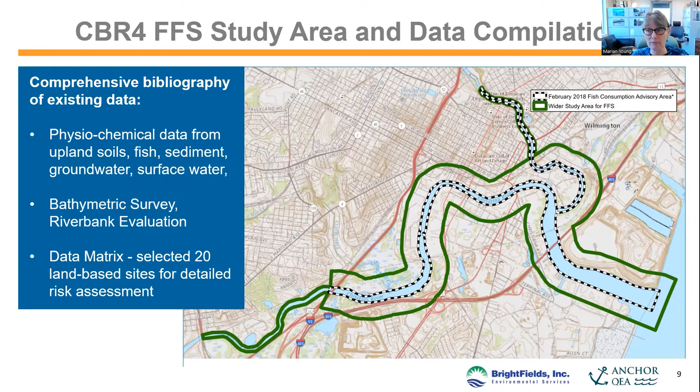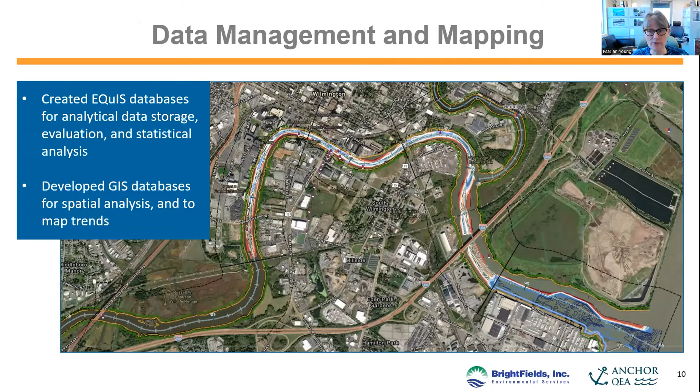We're using EQuIS and GIS databases to store, manage, and statistically analyze test results and to map contamination patterns and data trends. We're working on a report that will summarize baseline conditions and identify data gaps, and we're preparing proposals to describe the studies that are needed to fill those data gaps. So that's the update on the focused feasibility study, and you'll hear more about this project at a future workshop.

Today's workshop will focus on reviewing and discussing the draft CBR4 goals and strategies and capturing all your thoughts and ideas to strengthen the CBR4 program. But before we delve into the workshop, we're going to hear from an inspiring speaker, Lisa Bloodgood, who is doing similar river cleanup and restoration projects on Newtown Creek in Brooklyn, New York. Until very recently, Lisa was the Director of Education and Advocacy at the Newtown Creek Alliance, a community-based organization dedicated to restoring, revealing, and revitalizing Newtown Creek.

There's a lot of similarities between their story and our story. Newtown Creek is in the Hudson River estuary, which, like the Delaware estuary, is part of the National Estuary Program. In 2017-2018, the Newtown Creek Alliance worked with their partners at Riverkeeper and the Estuary Program to create a vision plan, and this is what we're doing now. They identified priority issues and proposed a list of projects to address remediation, restoration, recreation, and resilience. Lisa recently took a new position at North Brooklyn Neighbors, where she continues to work on community-based solutions for public space and the environment. She's here today to talk with us about how important a vision plan was to Newtown Creek Alliance's success. Take it away, Lisa.

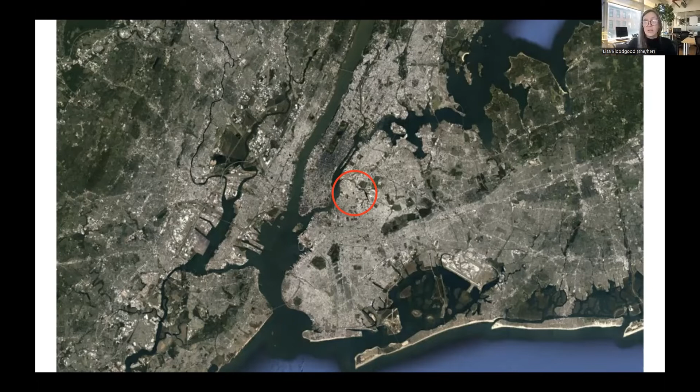Just for a little bit more context, Newtown Creek is part of the larger Hudson River estuary system, a border between Brooklyn and Queens, and really centrally located within New York City. As you can see, and we all know, New York City is highly developed, and Newtown Creek has been an industrial waterway for a very long time, but it wasn't always that way. I think it's very important to always ground our future visioning in our past and understanding what the geography and topography was, which helps inform what we're dealing with in our present day and in our future.

So you can see it was a very productive wetlands and was completely industrialized by the middle of the last century.

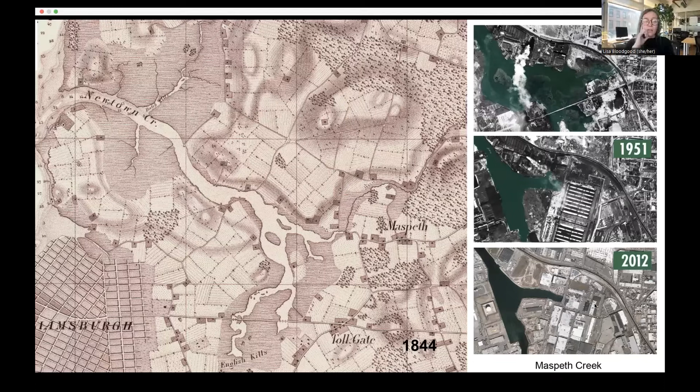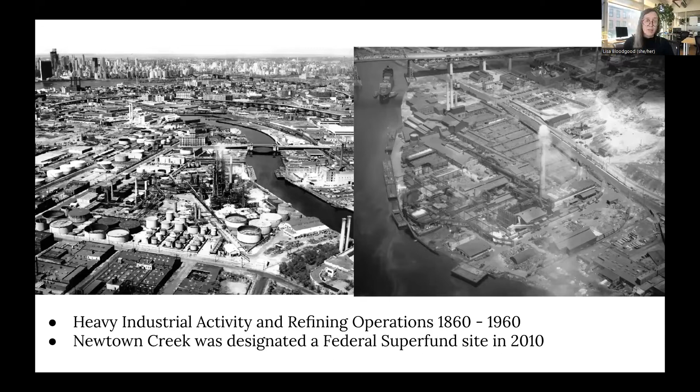Newtown Creek was really the center of industry. This is where modern day oil refining began, and that's a big part of why it's a Superfund site today. These are historic images, we don't have the refineries or chemical facilities there any longer, but that legacy is still there, which is why in 2010 we got our federal Superfund designation.

The vision plan was really about creating an inspiring vision that both boroughs and all the communities around the waterway could get behind. Because it's so industrially zoned, there's been no public access for more than 100 years, so the community has been removed from that waterway and it's been hard for people to imagine what is possible. We're also really interested in making sure the waterway remained industrial. That's important both to the communities that rely on those jobs, and for the city itself.

We have to have industry in our cities to manage things like waste and wastewater treatment facilities. So our vision plan is designed to show the current state, the whole host of project opportunities, and kind of give bigger picture system solutions.

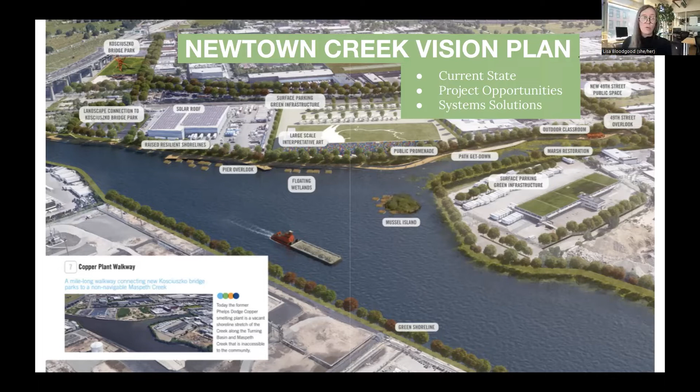I'm going to explain a bit of our process, and then what we've seen in the last 2-3 years since we released the plan. Our approach was really water focused, community driven, and we developed these 4 R's. Resiliency, remediation, restoration, and recreation were the real parameters we wanted to establish for each of these projects.

Partners are everything, we can't do any of this alone. We need city and state elected officials and agencies and community members, and some of our strategic water partners: Swim Coalition, Stormwater Infrastructure Matters, Riverkeeper, Billion Oyster Project, and the Waterfront Alliance, all kind of address different modalities of engaging the water.

Our planning lens: how do we want to view each of these different opportunities? Parks and public space, and others, having clearly defined planning lenses allows people to engage within those contexts. So if somebody's really interested in water quality and coming to a visioning session, they can focus just on water quality and dive deep into that planning lens.

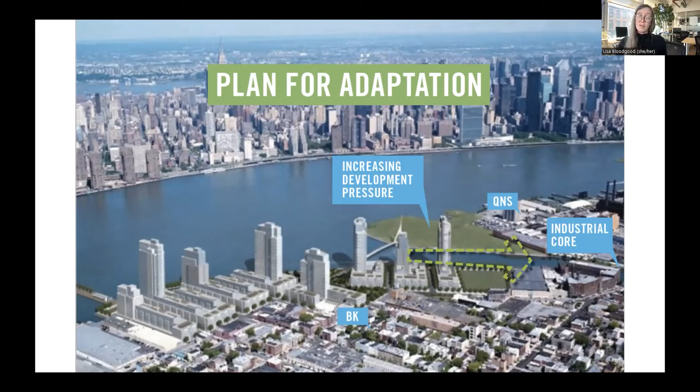And of course climate risks, not just flooding but issues like the urban heat island effect, pollution. Again, we're a federal Superfund site, so that is paramount in how we're thinking about the waterway now and what we want out of that cleanup.

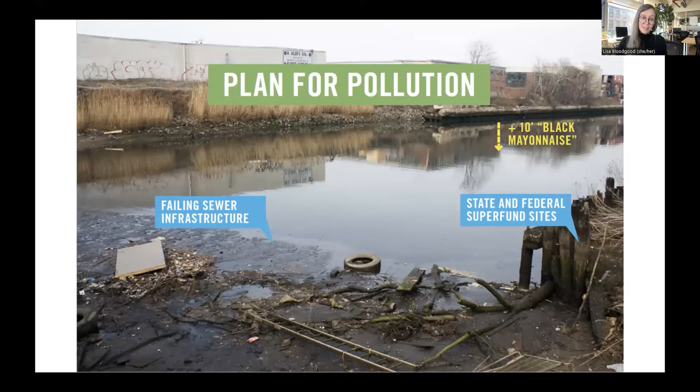Public access is so challenging in industrial spaces, and so we're really having to challenge city planning and zoning codes to allow for those spaces in these non-traditional areas. That has been, I think, one of the most interesting and exhilarating parts of this conversation, redefining how we can use these spaces.

Because it's a Superfund site, we have this pre-existing community engagement group, the CAG, that already had these 12 principles outlined that were most important for the Superfund cleanup. That was also an early foundation for the work in front of us.

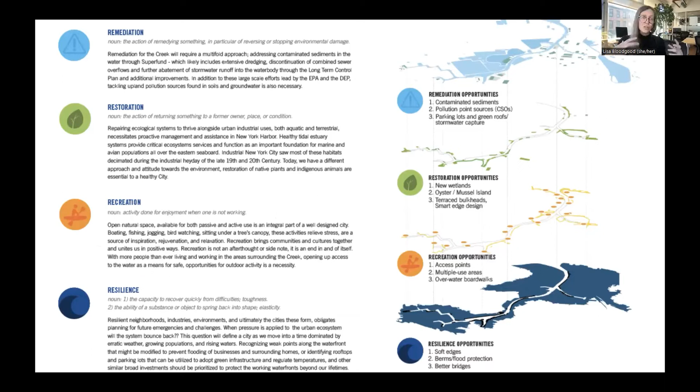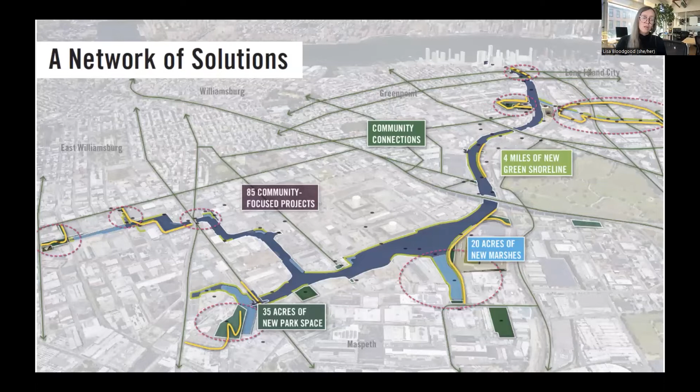And this isn't meant to be an engineering document. This is meant to be an inspirational document, which I think is really important to also articulate.

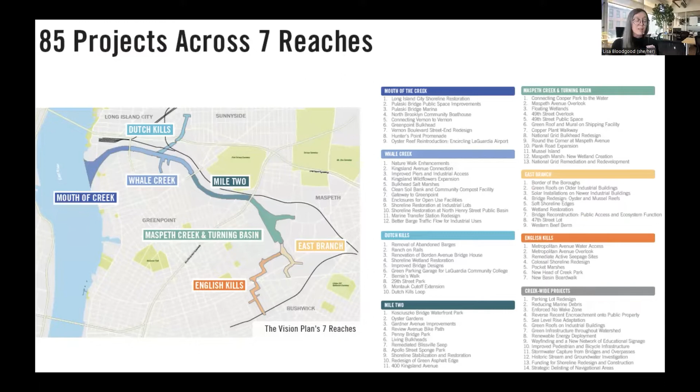Since we launched the vision, the response has been really, really exciting, from regular community members all the way up through our federal representatives and some of the trustees from the Superfund process, like NOAA, the State Department of Environmental Conservation, and Fish and Wildlife Service.

So coming at this idea from both the grassroots community and winning hearts and minds of our youngest members, all the way up through our elected representatives and city agencies and city planners, is key. And we've seen some really exciting activity around certain projects.

This one in particular has been phenomenal to continue to work on, because it started as this idea of transformed urban agriculture in an industrial space and regenerative industrial uses. It's anchored by a community garden that started on some decommissioned rail lines, and it's grown into its own project with its own steering committee.

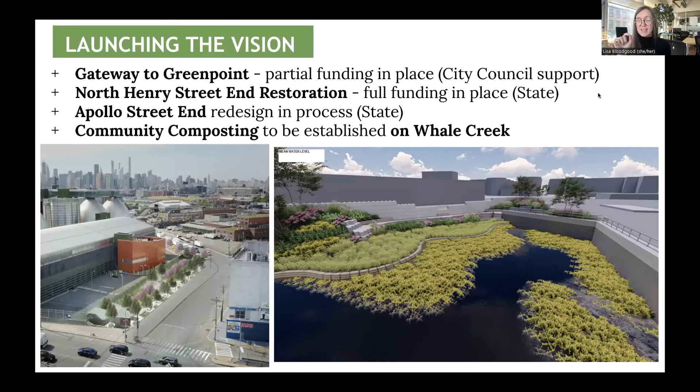So planting seeds goes a very long way.

Something I'm also extremely proud of is this idea of challenging zoning and really thinking about opportunities on the waterfront, on these underutilized industrial properties that could transform how we're viewing our waterfronts and shorelines in these non-traditional spaces.

Every 10 years, New York City Planning Department is required to do a 10-year vision plan for the city's waterfronts. They were really excited to incorporate some of our goals into that broader waterfront planning document, which again was something I'm very proud of.

I'm very excited for the next 10 years of broader New York City waterfront development and how these ideas will begin to transform our shorelines, our access, and our ecology.

And then a slide I do not have, but is also really important within the context of the Superfund and the proposed cleanup we're going to be getting on Newtown Creek - there's no real guarantee that restoration monies will be spent on the waterfront or on our waterway. It can be spent upstate New York, or there can be an in-kind restoration that happens elsewhere.

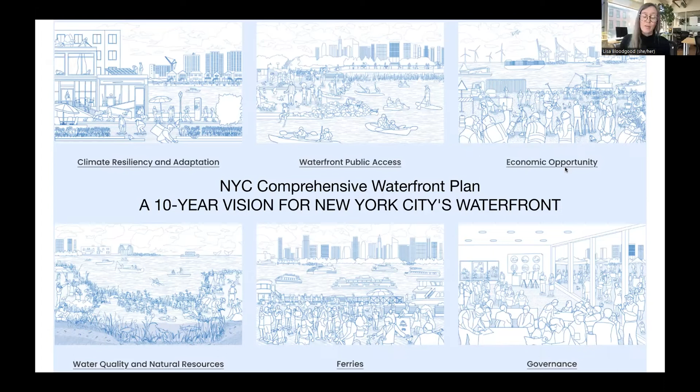That's all I have for you today. But I really hope that what we did in Newtown Creek is inspiring and useful. As much as you can do small actions with small groups of community members in tandem with these bigger vision plans, that's just going to make your process and your end results that much better.

I encourage you to please reach out to myself now at North Brooklyn Neighbors, or our executive director at Newtown Creek Alliance, Willis Elkins, if you'd like to engage the Alliance. But please do take a look at the vision plans online. I think they're beautiful. And thank you again so much for having me.

This is great. Well, and thank you, Lisa, so much.

I think I've been a big admirer of your plan, just looking at it online since we started this effort. And it is a larger area, a more urban area in many ways, even more challenged than what we're looking at here. So I think to myself, well, if they could do it in Newtown Creek, then we can do it here for sure.

But it's nice to look at someone else who's been in the shoes that we are now, or close to it, and think about how that could be successful and really launch things, because we really are looking to this CBR4 plan and vision to launch things here, even though there's been a great amount of work going on, but really to have it as a unifier. And it's so exciting to think that we could be in the place that you are with your plan at this point too. So thank you so much for coming and being part of our program.

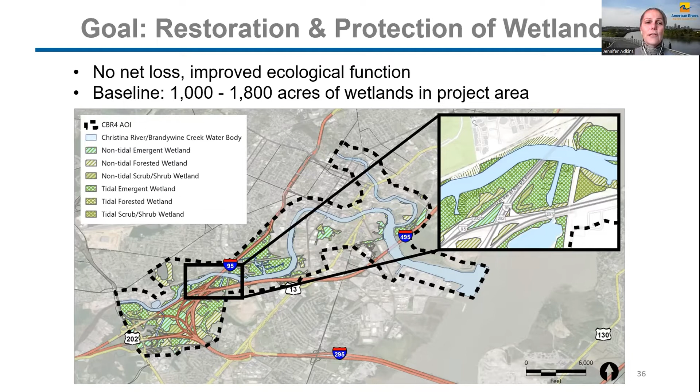We also want to see projects happening that improve wetland functions. Just because you have a big wetland doesn't mean it's as healthy as it could be. It may not be producing as many fish as you'd want, or the water might not be getting cleaned as well as you'd want. Those are the improved functions we want to see from wetlands.

We also have goals around protection of shorelines. Shorelines are another really important habitat and water quality area, where the water meets the land and there's an interchange between them. We have over 100,000 linear feet of shoreline in the project area, and about 60% of that is in some sort of natural state.

By natural state, we mean it's not partially or fully hardened. When we talk about hardened shorelines, we're talking about seawalls or big rock structures that prevent any exchange between the water and the land. For the purposes of river health, we like to see natural shoreline, and that's one of the things we'll be tracking.

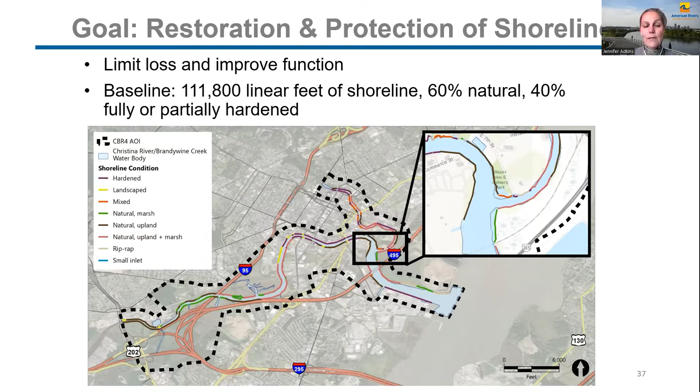What we want to see is very limited loss of the places where there is natural shoreline, and where there isn't, where we have those hardened shorelines, we want to improve the function of those areas by greening them up—a term we've been using—to make them more valuable ecologically for fish and wildlife, but also for water quality.

We also have goals for riparian areas, which are the 100-foot buffers out from the shoreline, from where the water meets the land. That area is critically important for many reasons, including that it's often part of the floodplain—so when water floods and comes up, that's the space where those floodwaters can go.

In addition, those areas help filter water running off the land. If water is running off and picking up pollutants from parking lots or elsewhere, a nice healthy buffer can help prevent some of that pollution from getting into waterways. Along the riverfront, a lot of these areas are used for stormwater management, which helps with water quality.

In our corridor, we have over 1,500 acres within that 100-foot buffer area. Interestingly, even though it's a highly developed area, about 70% is undeveloped—there aren't actual structures right there—which is good, because that's an area that's also vulnerable from a flooding perspective.

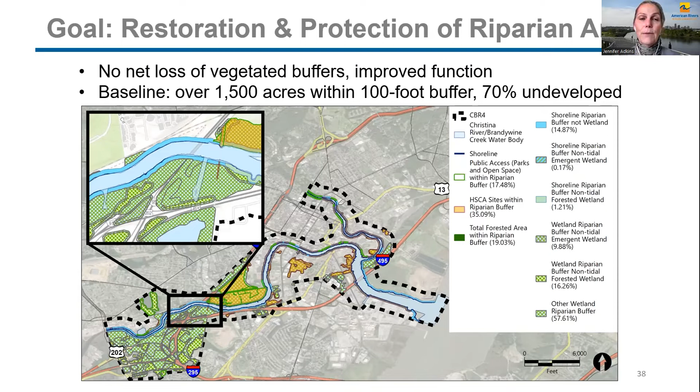What we want to see in our objectives around riparian areas is that we don't lose those buffer areas that have a lot of good vegetation, particularly where there are trees and other vegetation that help filter water. We also want to improve the functions of areas that don't have as much vegetation or the features needed to provide high value function.

The other thing we're looking at and have goals around is that in our corridor we have some adjacent habitat areas that are more upland. There are over 1,500 acres of those kinds of areas in the project area. About 20% are forested, and 35% are protected, meaning they're either parks or in some kind of protected use so they wouldn't be developed or destroyed. Also, over 17% of them are open to the public.

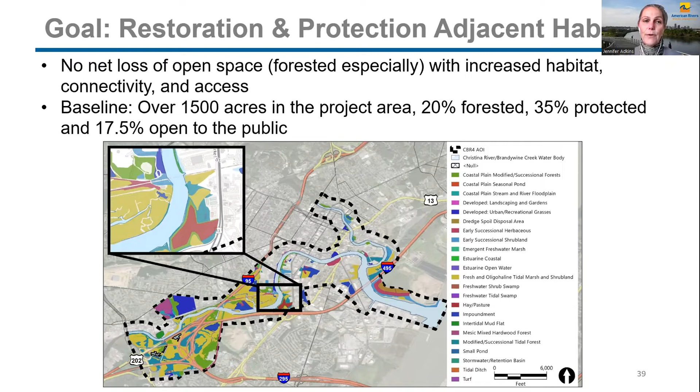So we know that these adjacent areas, especially the ones that are forested, are really important to the corridor overall, and to the quality of water and the habitat in the corridor and in the river. And if they're open to the public, or could be open to the public, they're also really important for access so that people can enjoy some of these areas. And for riparian areas too, looking at how people can be close to the water is important.

And of course, we do have some goals around remediation. Lisa referred to some of the challenges they have regarding contaminants, which sounds super challenging, and we have some of those issues here too. Our whole river is not a Superfund site, but we do have quite a few properties, and you can see those on this map, showing over 530 acres of land in the corridor and over 630 acres under the water. So the subaqueous land under there has been impacted by contamination in some way or another. This is definitely a big issue in the corridor that we want to keep moving forward.

Some of our objectives around this include: we definitely want to get that feasibility study completed, and we want to see continued remediation of the priority sites that have been identified, to reduce loading and to reduce contamination of fish over time. It takes a long time to meet the goals of reducing contaminants in fish tissue, but we're already seeing some progress on that. So that is one of our goals there.

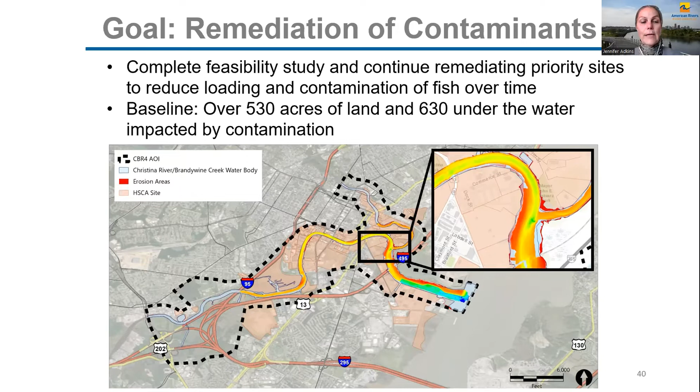And then also access - I've already alluded to this in some of our other goals. But in our project area, I've skipped forward to access - first, resilience. So Lisa mentioned climate being on their list. Well, climate is definitely on our list too, and it is one of the main things we want to be looking at for all of the projects and strategies that we're developing.

In the project area, there are 700 acres of low-lying, nearshore areas, which are places we really want to pay attention to, because if they're undeveloped and have some good natural infrastructure, they can help absorb floodwaters. Important in the baseline is that there are 7 acres of existing tree cover, and we know that trees can absorb floodwaters, and they also help keep neighborhoods cooler as we're expecting more extreme heat.

Our main interest around resilience - I should mention we're mainly looking at resilience to the impacts of climate change: flooding, sea level rise, increased heat, extreme heat. What we really want to see is not a lot of loss of those low-lying natural areas that could be good places for floodwaters to go, increasing tree cover, and a balance of green infrastructure and gray infrastructure to deal with stormwater, making sure flooding doesn't put people or important habitats in harm's way.

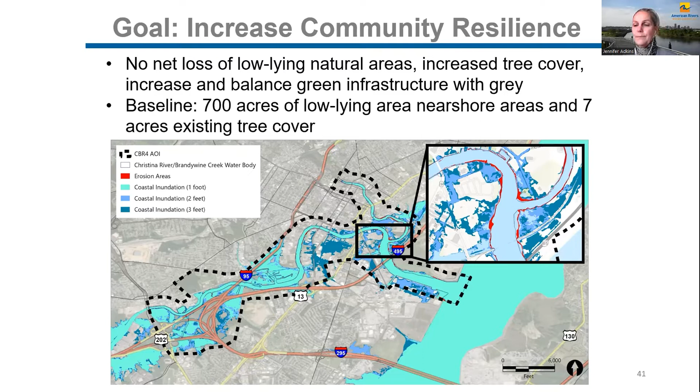And here's access - last but not least, community access to rivers is one of our primary goals too. In the project area, we have over 18,000 linear feet of buffer areas that are publicly accessible, 16 miles of trails, and at least 7 direct access points to the public. Although we know communities value this direct access, there's lots of other access that is just as important - having areas with trees and seating near the water and a variety of views of the water is important too. So we're looking at all of those types of access as we look at the corridor.

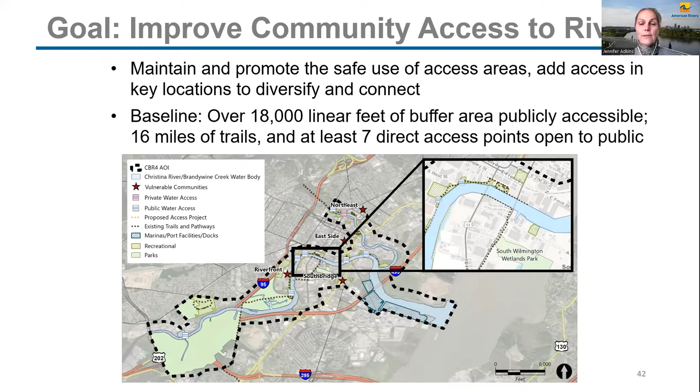We've just started, you can see on this map, to compile existing information, but we're also trying to scope out where some of the opportunities might be. So that's a lot of what we've been working on. Every one of those maps has many data sources behind it, lots of different information that our project team has tracked down, and we're using them to understand where we are right now, so that we can set the goals and then come up with strategies and projects to actually reach those goals.

And so we have also, as a team, started working on strategies. I'm going to give you a really high level, very quick skim through these strategies, because you're going to dive deeper into these in discussion.

Just to give everyone a sense of what kinds of strategies we're talking about, there's a whole realm of restoration strategies, trying to restore different types of habitat and features where they don't exist anymore, or don't exist as much as we want. Everything from doing the actual work to making sure projects have good metrics and goals so we can monitor them over time and see that they're actually having the function we want.

Also providing guidance to landowners and managers, recognizing that conservation organizations and agencies may not be the only folks doing some of these projects. We want landowners and managers to be able to do some of those projects too.

Also in restoration, clearly identifying and implementing projects to restore wetlands, and those habitats in and along the water are going to be some of the most important ones we'll be working on. But also identifying and implementing projects that help connect different key habitats is important.

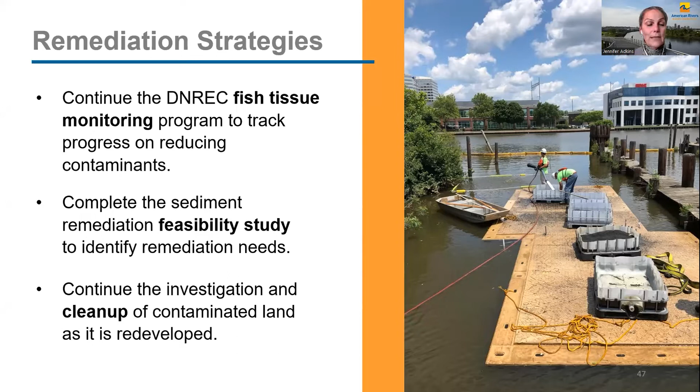Continuing those, but also thinking forward to new approaches needed—whether that's a new approach to remediation that incorporates more restoration and provides tools and BMPs to help those doing remediation make better decisions, in a way that incorporates restoration, but also developing innovative new technologies for remediation.

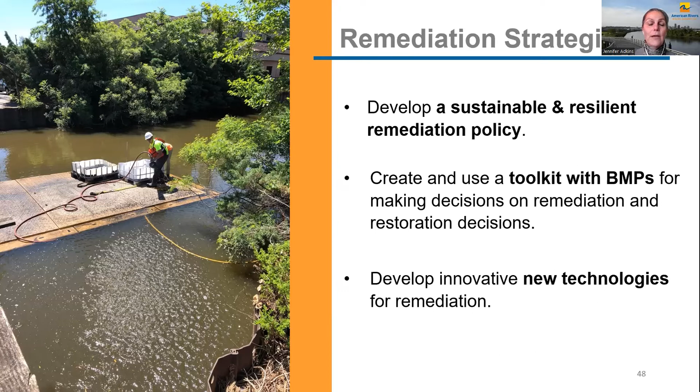A good example project is the work DNREC is doing at the A Street ditch, which this picture is from, where they're applying a new technology to address some of the contaminants there. If successful, we can use it in other places along the river, and other people could use it in other places, potentially along other rivers.

Then we also have resilience strategies, trying to figure out are there projects that we could do that will help make this area more resilient to flooding and sea level rise and intense heat that we're expecting from climate change. We recognize that there is some work around flood studies and modeling that is a lot more involved than what we can do as part of our planning, but we know that needs to happen. There's also an effort by the city underway to develop a resilience plan for sustainability, and we're very interested in taking a look at that and seeing what kinds of strategies we can help forward through this plan.

And then also in resilience, to look at specific projects that could help with flood control, whether that's using green infrastructure or a combination of green infrastructure and harder infrastructure. We also know that trees are going to be incredibly important, greening, to make sure that they're helping to absorb water and helping to cool some of our local communities. And also making sure that we have lots of places where water can actually get into the ground instead of running off, so reducing impervious coverage.

A good example project of a resilience project might be the South Wilmington Wetland Park, which is the graphic you see here, where it's helping to provide flood control but using green infrastructure, providing a lot of habitat and hopefully water quality improvement. It's using green infrastructure along with hard infrastructure. There's also work happening to separate a combined sewer system there, and those two things need to be part of the solution when we're talking about resilience.

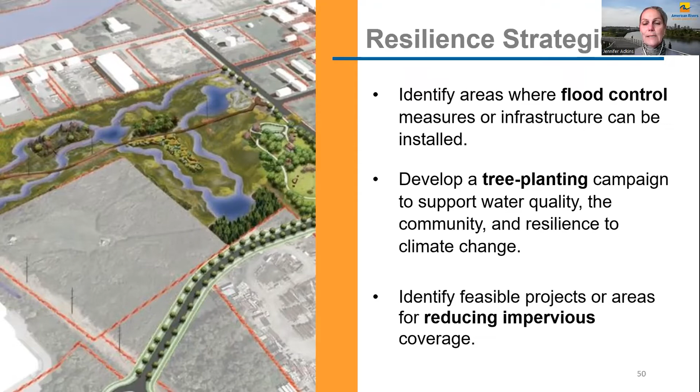And then there are strategies that are more aimed at education and engagement. We've identified a whole range of those, and this is really just skimming the top, a high level overview, but everything from the idea of a community advisory council, a host of educational programs, and also monitoring programs. Importantly, programs like all of these would bring not just scientific knowledge to the table, but combine that with community knowledge so that we can come up with the best possible solutions, not just from an ecological or scientific perspective, but from the perspective of all of the folks who rely on these waterways for the best projects possible.

Also in education and engagement, we talked about activities that will involve corporations and funders and needing a grant writing team. This is particularly relevant now. We've talked a lot about water infrastructure, and there could be a lot of opportunities, making sure that we're able to access those for the projects in the corridor. Ultimately, we'd like for CBR4 to be a model for other waterways, so it'd be nice to be able to share our success the way Lisa was able to share the Newtown Creek success here with us, so others can learn from what we're doing here.

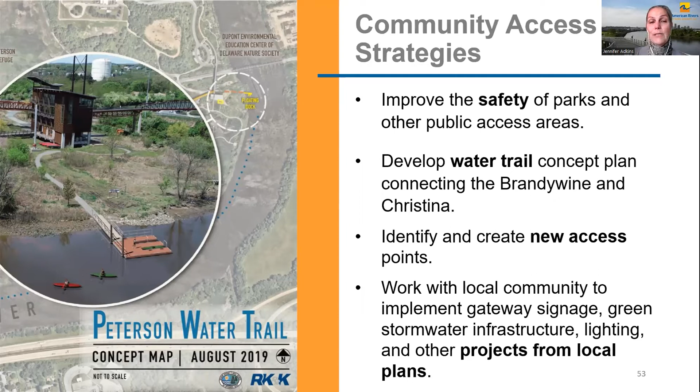We want a variety. We also recognize that there are a lot of good projects that are part of local plans that we can pull from. Southbridge has a new neighborhood plan, and in the Northeast there is a blueprint implementation plan. So we want to be able to pull up and recognize and advance the work that has been done in previous plans in our strategies too.

And last, but certainly not least, there are some strategies that fall more in the public policy realm. Whether that is at the local level, with things like improving building codes and development requirements and improving zoning for healthier rivers and for people, or others that might be more at the state level, looking at what kind of protocols we can have for building restoration into really big projects like roads and bridges and transportation, but also taking a look at all of the impacts of projects like that to really look holistically how they're impacting water, air, land and people, and then factoring that into decision making.

And also for all of our projects, to think about at the community level, when we're adding development or green space, finding ways to make sure that we're avoiding negative impacts to local communities with things like community benefits agreements.

So I'm going to take a big breath because that was a lot of information I just dropped on you. That was an attempt to summarize a big body of work that our project team has been working on for the last several months.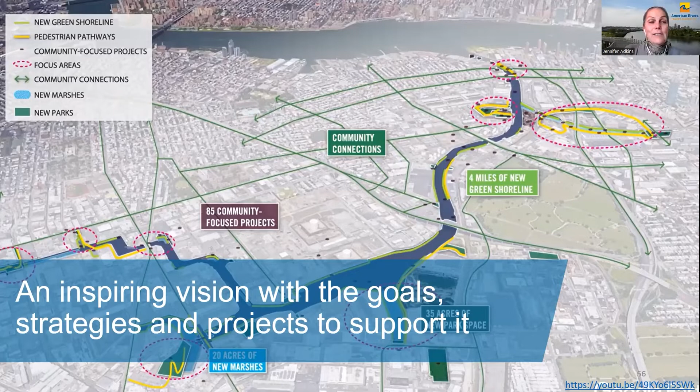Before we start digging into identifying the projects, we want to share what we've done with you around the goals and strategies, and we really want your input on the strategies. We want to hear from you: did we get it right? Did we get anything wrong? Are we missing anything altogether? That's going to be the focus of the next part of the workshop, with a lot of breakout groups.

We are going to take a quick break before we do that. But before we take the break, we would like to hear from you now in a poll, to see how you would like to be engaged as we move forward.

This isn't the end of us getting input from you. We want to know—our webinar is a good thing, our workshops like this are good. We could do something more like a newsletter. We certainly can do, and have been already doing, some individual presentations to a specific community. We can do social media, websites. We probably can't do all of these things as much as we would like.

So I'd really like to hear from you about which ones work well for you and which ones you think are most important. I see that people are already populating the poll. We're going to give that a couple minutes. Looks like we have just over half.

We're up to 60%... staying around 70, so it looks like we have strong... oh no, it's still switching. It looks like we have strong support for lots of these things. I should also mention that if you have other ideas or preferences around this, or even topics, please put those in the chat. You'll have an opportunity to bring them up in the discussion, but we will be saving everything from the chat and using this information to guide us as we move forward.

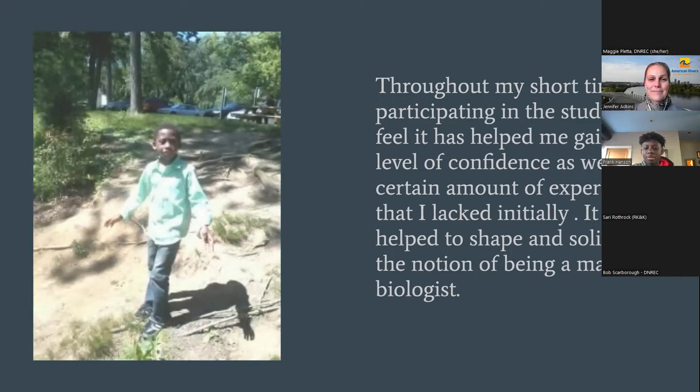Because I just really enjoyed being there, you know. And so things that I wanted to see more of were day camps during the summer, so kids wouldn't have to spend the night, but they'd definitely get a day just hanging out at the river, learning how to fish, learning about picking up trash. Maybe there'd be a day they could actually try the thing I did, going out on the river with that net, with an adult.

Obviously, another thing I wanted to see is more public events. Like the Shad Fest, that was actually really fun. So many people came out, and it was just a really nice experience. I think a lot of people had fun. We had music, and there was teaching kids how to fish. It was a really fun experience for me.

When I was doing my thing during the summer, I was the only kid my age there. The youngest person there was a guy in college, and he had to be at least a senior. So I want to see more people my age doing this, because it's actually really fun. It's something I'm interested in, I'm passionate about. I think there's definitely a lot of people who feel the same as I do.

I feel like the only way you can really get into this is if you know people in the program. The only reason I got into participating in this is because my dad knows Mr. Simeon. I feel like if we pushed more — I don't want to say commercial, I mean more things to show people, like websites, pamphlets — just easier access to information in general. It makes it easy so people can get involved if they want to. Because some people say, oh, I would love to do this, but I don't know how. So you just make that information available for really anyone, for the public to have. And yeah, that's really it. Thank you.